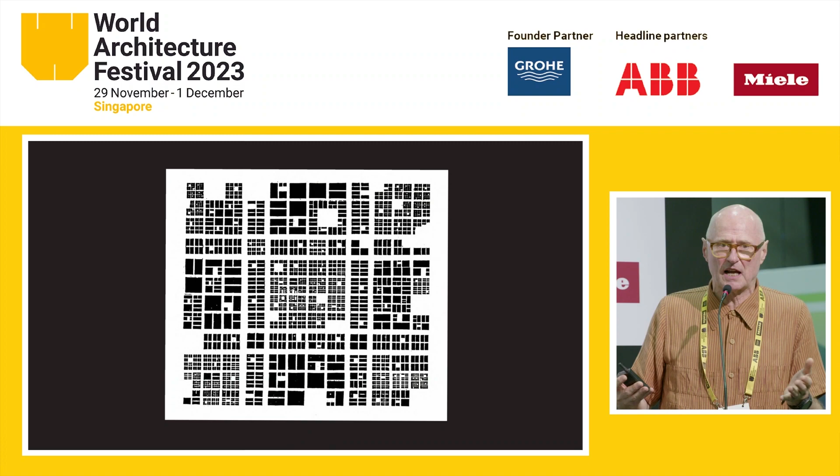As architects, as WAF shows, we tend to think about buildings, but buildings are really integrated parts of the city. As a profession, I think we need to take our thinking beyond buildings into ideas of the city and infrastructure. This is a student drawing we made 40 years ago, but it's all about the most permanent parts of the city anywhere in the world, even in a dynamic city like Singapore, which are the streets. Buildings actually come and go over time.

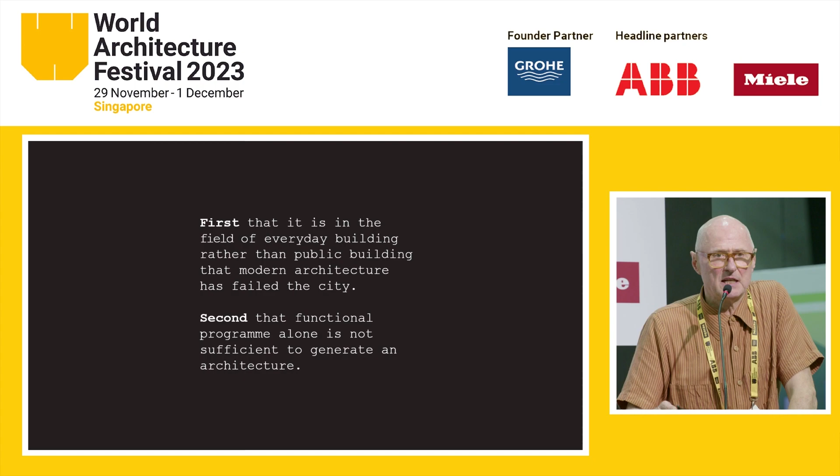We always felt when we were young, and we feel it now when we're old, that function - the thing we get to talk with our clients about when we commission a building - is a short-term proposition, whereas a building needs to be a long-term proposition. Function does not drive architecture.

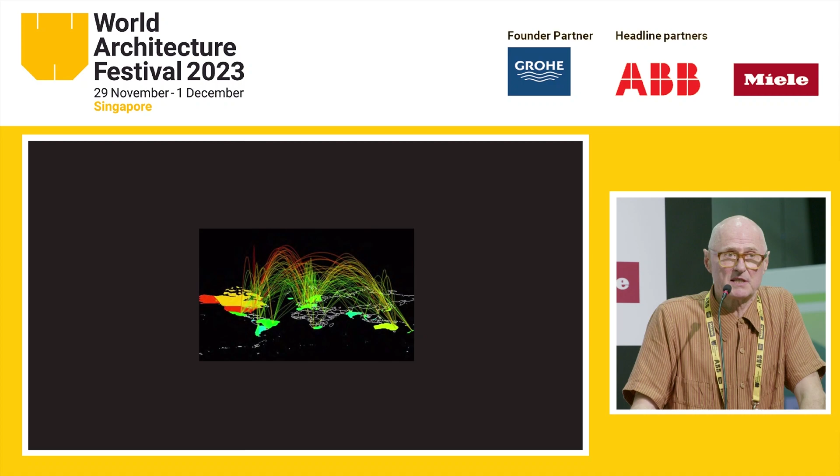We talk a little bit now about the internet, but the whole COVID thing demonstrated to me the importance of people coming together. The conversation, the eye contact, is a completely different experience. It is why cities will flourish, and people do need to exploit technology, but not to rely on it. That's the COVID world we experienced - a world of people trapped in their rooms, disconnected from society, an unhealthy world.

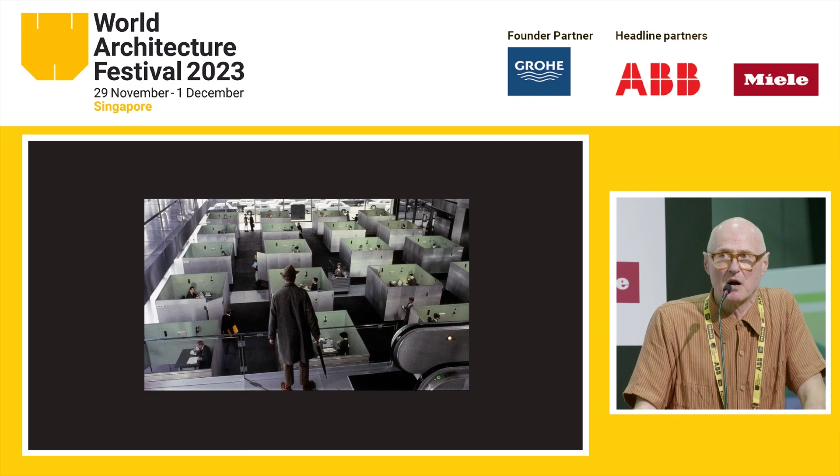City makers have always been aware of this. Cities are visions of the idea of town and country coming together in a place. The social promenade of the street is the civilizing force of the city.

Infrastructure. The street is the infrastructure which our buildings frame, but there's another form of infrastructure - the data movement, the water, the sewage, the transport. Those are the big drivers of future cities.

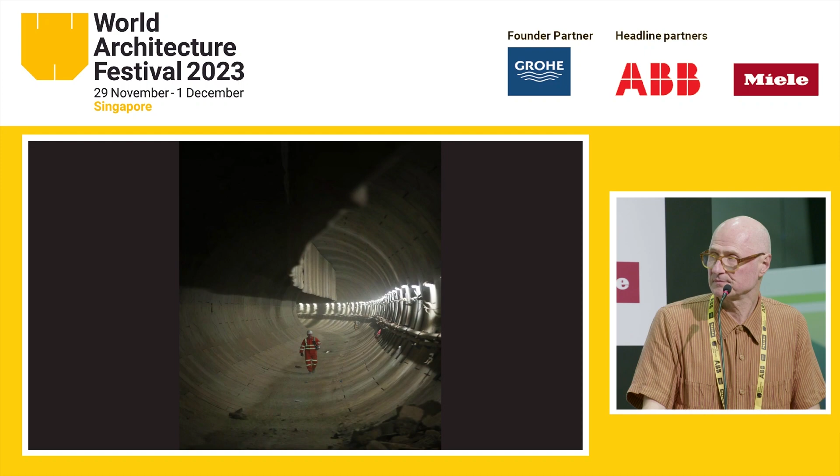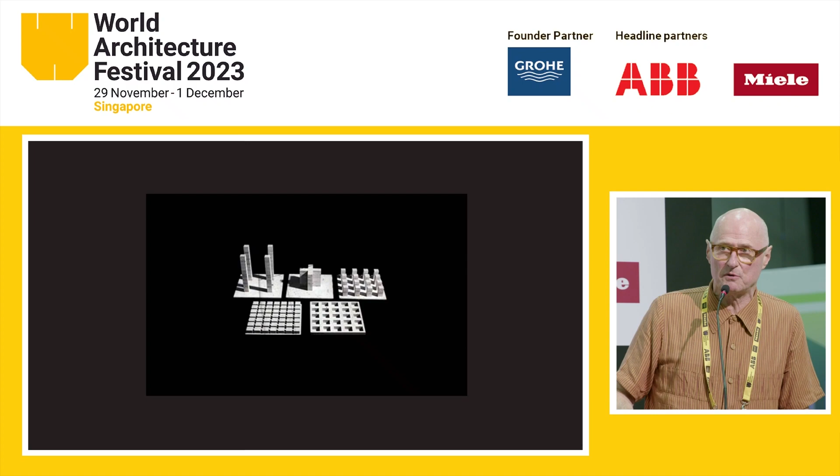The carbon discussion, which is going on around the world now, is in danger of doing the same. So we need to know numbers, but we also have to have a bigger idea.

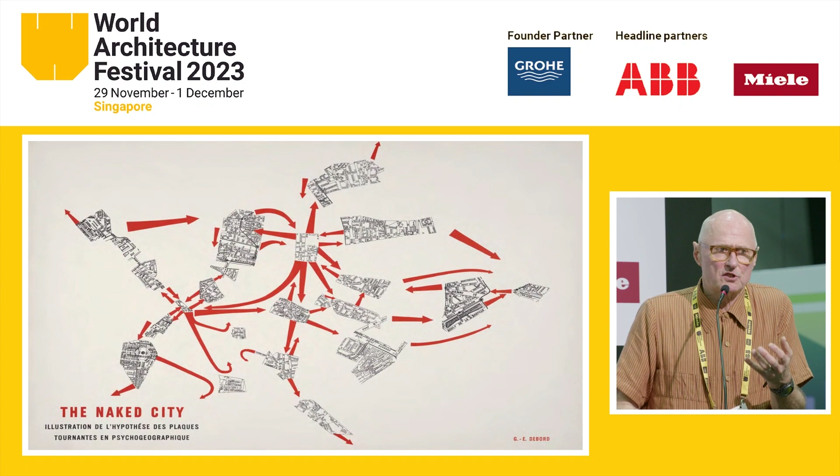This is Guy Debord, The Naked City. It recognizes that the city is different for each individual. Our journey through it, our understanding of it, is personal to us. So it's an infrastructure with infinite potential.

Increasingly in the low carbon world, I think we're going to start thinking much more about what materials are to hand and how we can use them, rather than designing and then going to find materials. In a sense, that's the ancient history of architecture. That's what vernacular is - it's looking at what's to hand, what are the skills, the people, and the materials.

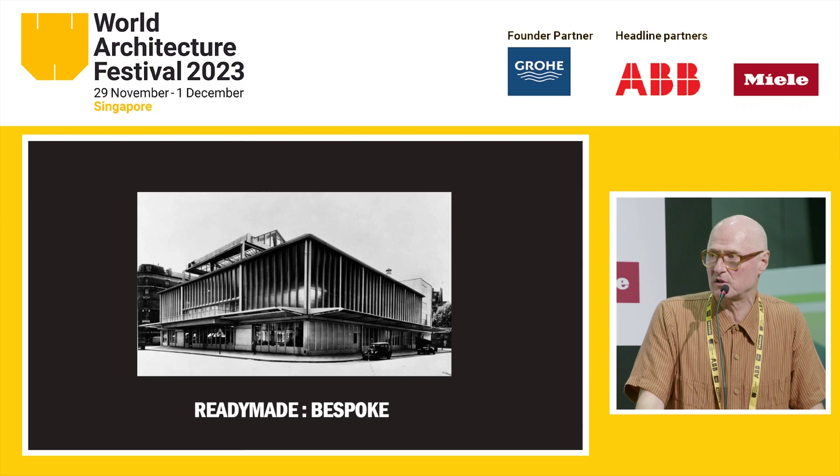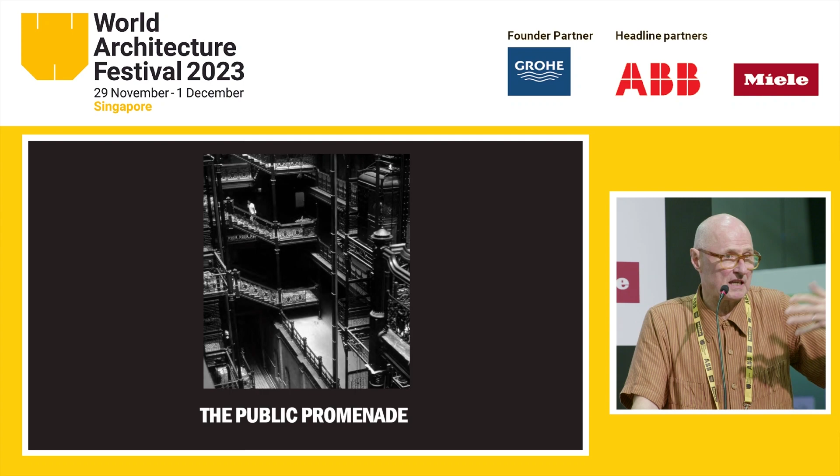So in a sense, at their best, our buildings frame an address to the street. And within them, the journey through them, the architectural promenade, in a sense, mirrors the city. The stairs, the lifts, the movements through our building are a three-dimensional mirror of the streets and squares within the city. And in the end, despite the fact that I'm very passionate about architecture, architecture is a backdrop to everyday life.

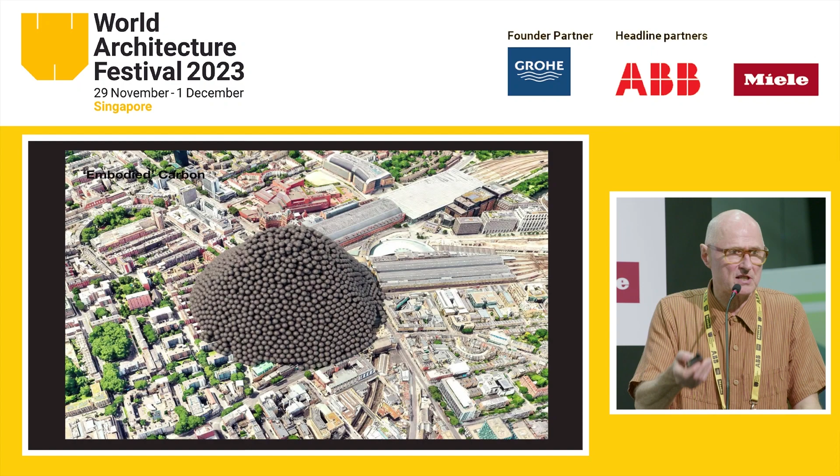This is a project, and now moving to this idea of what we're looking at in London now. This is a kind of graphic, in a way, a kind of homage to Buckminster Fuller, but talking about the carbon saving we need to make on a particular project. This is the diagram we use. This is the whole life carbon of a building.

This is the model that we're using in the UK. 1/3 is the embodied carbon to build it. 1/3 is the operational energy to run it over its 60 years. And 1/3 is the endless refitting of the building over those 60 years. That's what we're working to.

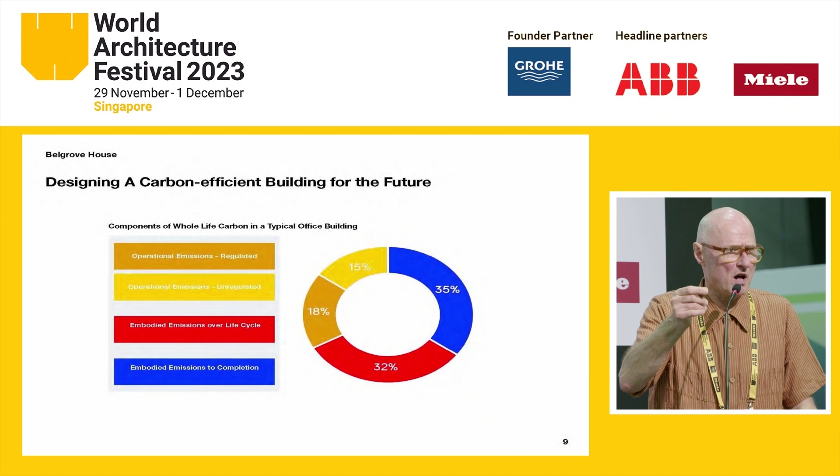I don't think it's a very good model. First of all, I think buildings should last forever now, so 60 years is too short. And then I also don't think we should waste all this money in one of the worst excesses of the modern world, which is this world of crazy, endless fit-out, the world of fish tanks and leather walls.

There are ambitious targets in London. So in the last 5 years, we've halved the embodied carbon in our buildings, and we're seeking to quarter the operational energy in use. Big, big challenges.

So all of these kind of numbers go back to the idea I'm talking about here, which is the frame. The frame is the first thing to go up, the last thing to go down. It needs to be generous, it needs to accept different uses, and it goes back to that idea that actually use is transient, building frame is permanent. The stage sets are the reality of occupation. That is the world of inserting a use of scale, an auditorium within a frame for a university. But most of our life is the props, the theatre of furniture, movable, flexible, adaptable space.

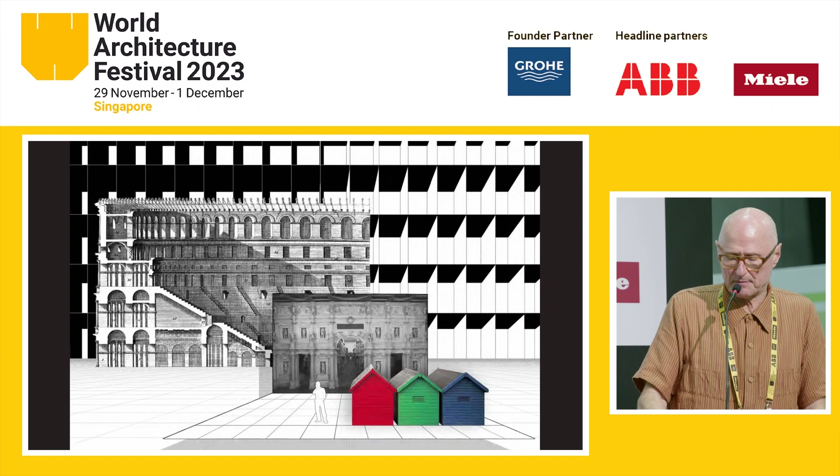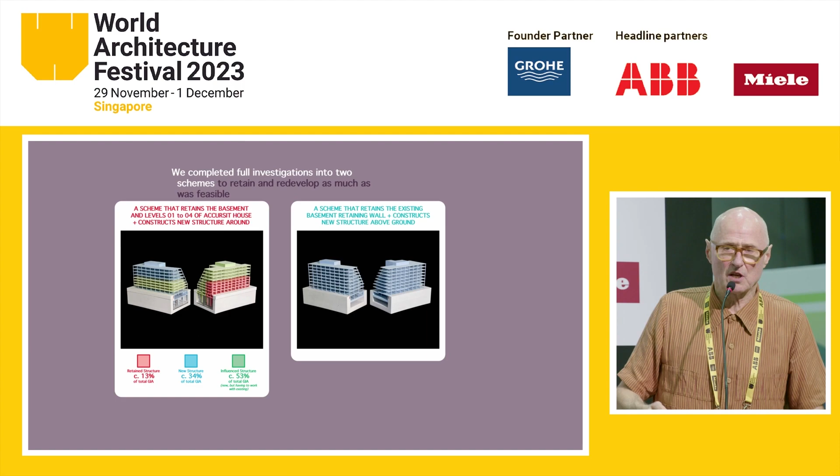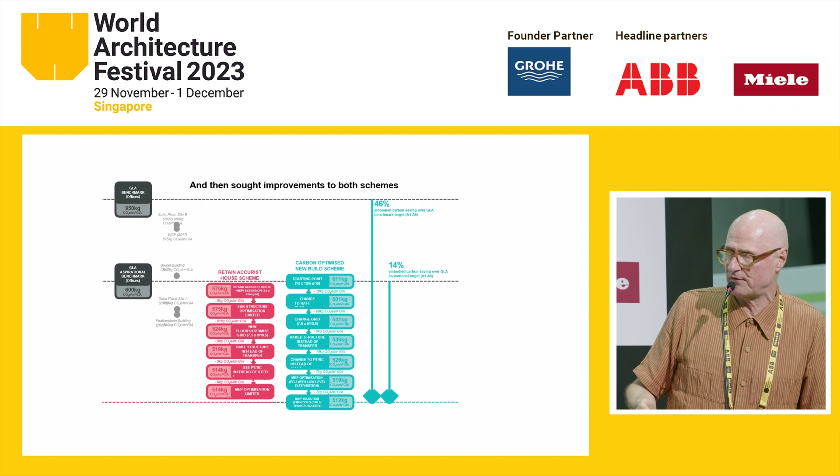This is the diagram we went through, the research diagram, and the blue on the right gets to a lower carbon number of about 512 kilograms. But of course, carbon's just one thing. There are a series of policy benefits, there are a series of social benefits, work, employment, housing, education.

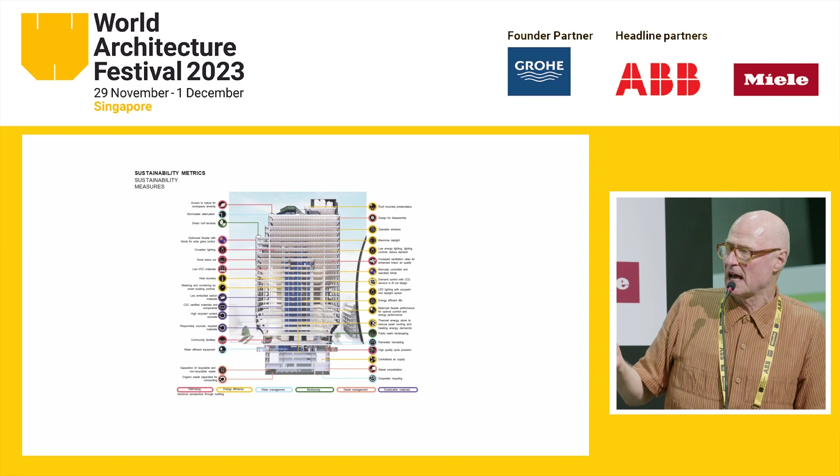This is an office tower in the city, built on a very undeveloped site right on the edge. These are the initial ambitions. This is the detailed analysis with our colleagues at Atelier 10 and our structural engineers, AKT2. This is the target, 1,100 down to 600. We're actually getting down to about 510.

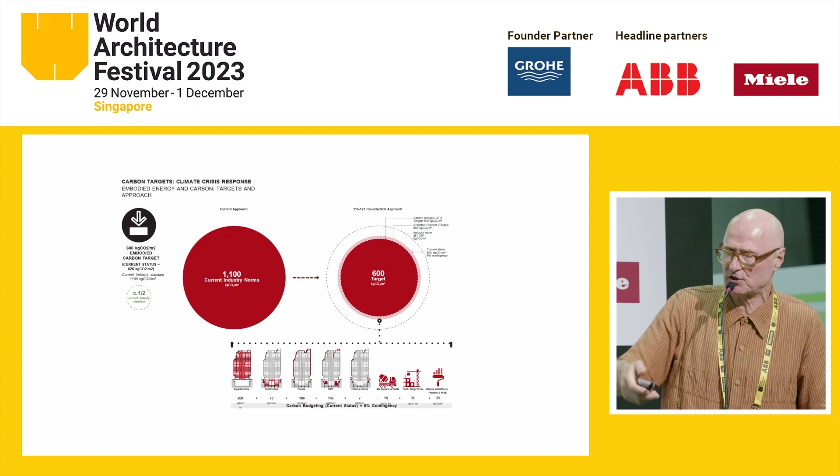The bottom is a kind of pie chart that shows where you bother to make the effort to save the carbon. So the big numbers are in the basement. Do we need basements? Here we store energy in the basement and then we give it free for social housing. So everything you do is always to be questioned.

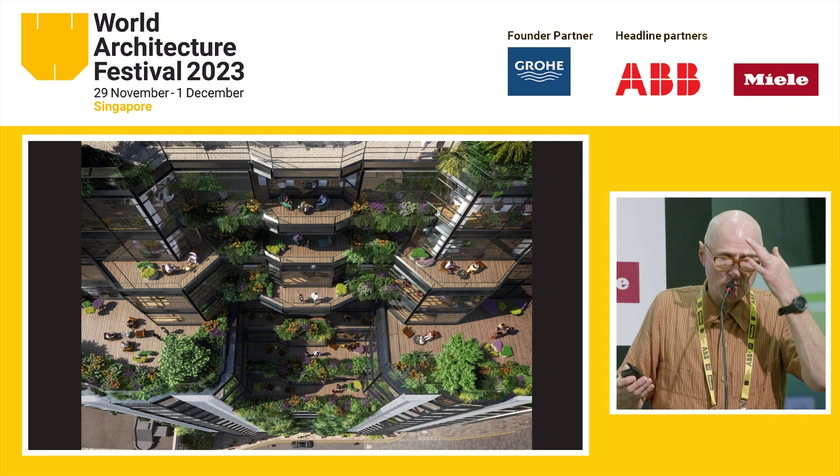This is the energy target, and there's a big problem we have in London, which is tying the base build to the tenant and getting the two to talk together. This is the architecture of the building. It's a biophilic building, it's wrapped in greenery, and has 20,000 square foot of terraces over 28 levels.

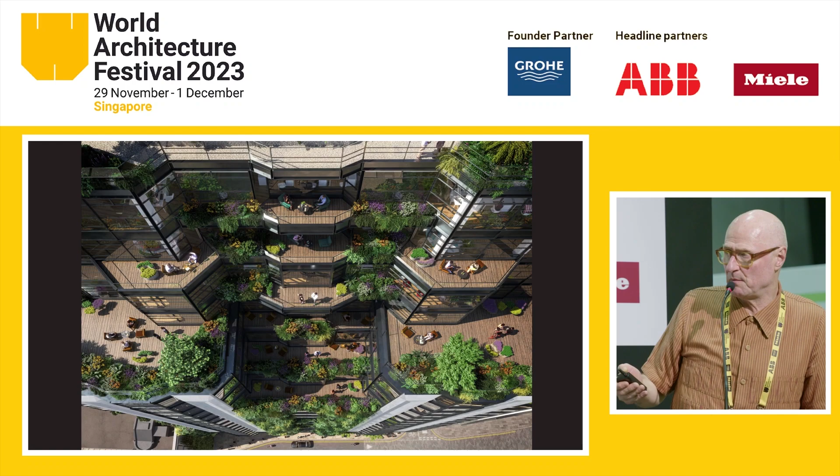One must not forget that a low carbon, efficient, generous frame that no one wants to be in won't work. On the left is a building in London that was only built 30 years ago, with 6 cores and an atrium. Sadly, a completely useless piece of real estate. On the right is our proposition, but it learns from that real estate.

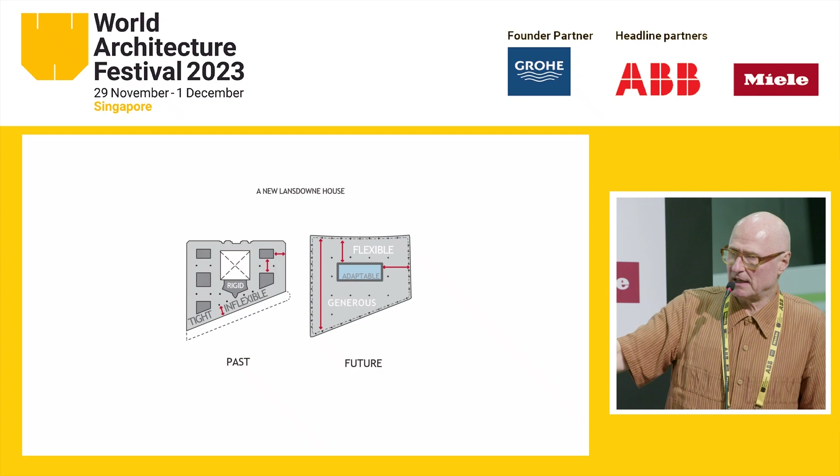The one thing we know is by the time you take the cores down, the building falls down. So we developed the idea of a donut where the core in the middle is not structural. It is a refittable item, and the building itself is a sway frame, a stiff frame.

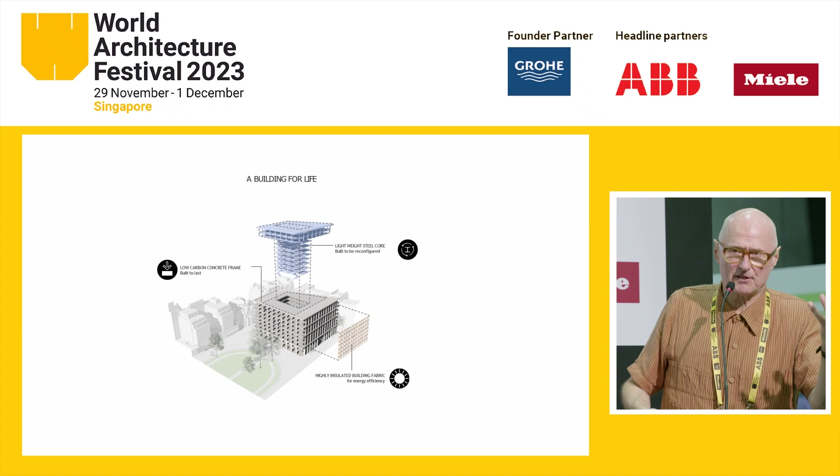So there's the diagram. You get the stiff frame and you get the lightweight core as an insert that can be endlessly refitted, but also the sway frame gives us an architectural reason, structure as scale, and we go back to putting windows in walls. And there's the building as it's now going up on Berkeley Square.

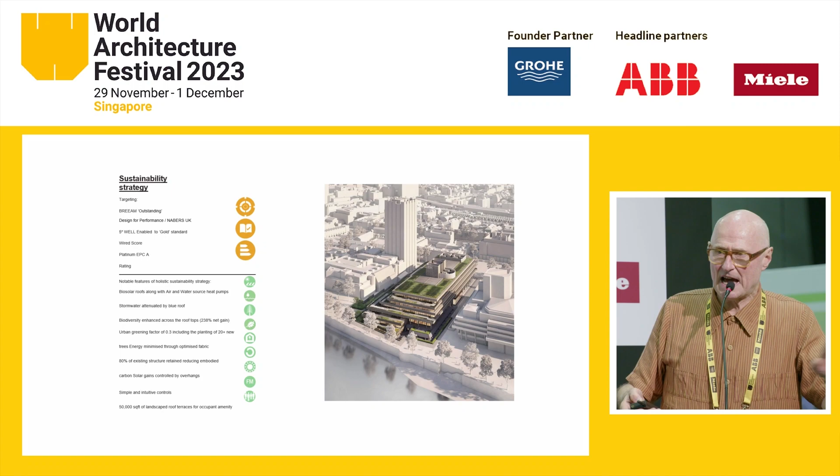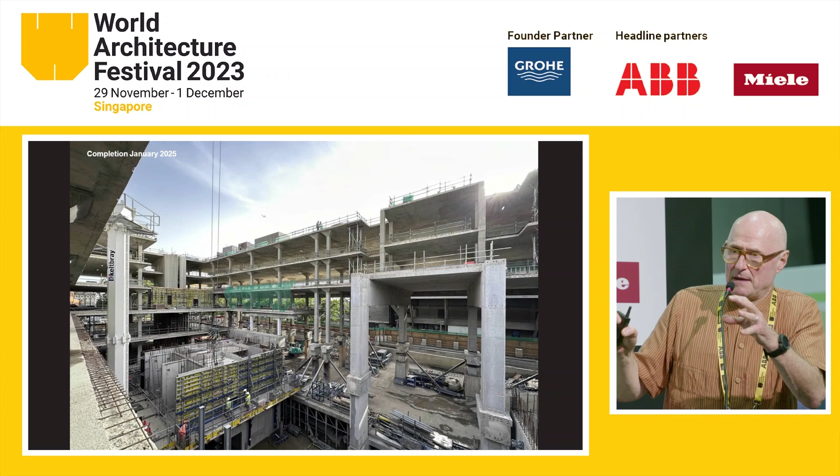This is IBM, a building that was listed while we were looking to adapt it. All the standards we talk about, NABERS 5-star, BREEAM outstanding, they used to be important, now they're a kind of basic level. We can get to below 400, we can get to about 340, we think. Even though we're retaining the building, we're still knocking 7 bells out of it, but the frame is being kept and extended, and that's the big driver, and then the new extensions are CLT.

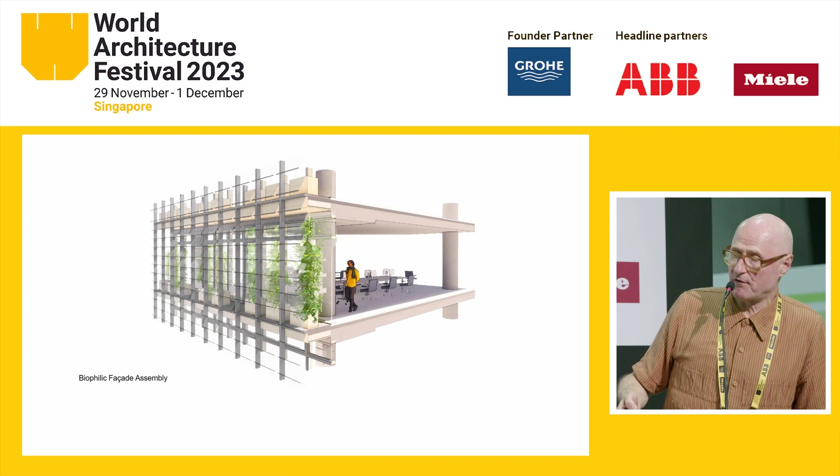This is a building in King's Cross. We take the building down, we recycle the bricks, which is a more poetic than necessarily an efficient idea. We build an affordable housing scheme. We build a new build labs for MSD, Merck, the global life sciences business.

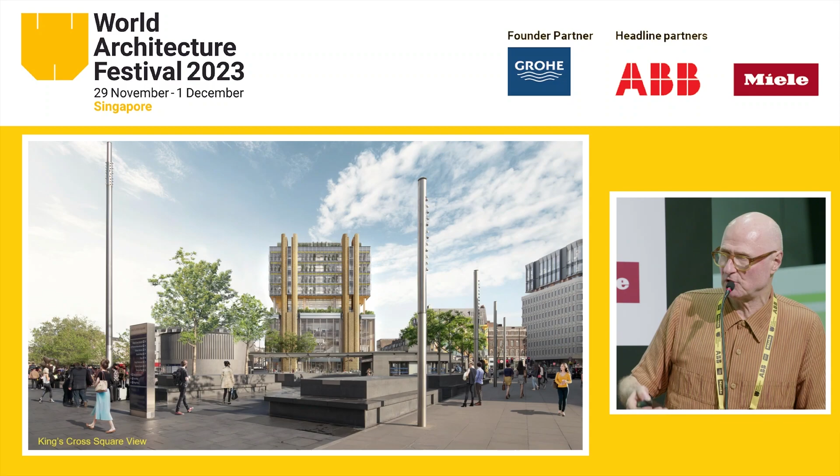We create the idea of a sheltered biophilic wrap, so the building sits as a kind of new industrial, 21st century industrial architecture right in the heart of London's knowledge quarter. And that slide has jumped to the end—I don't know quite how that happened.

But anyway, I'll finish there because it seems a nice moment to end. The point I was going to make, if I had a few more slides, but I won't bother, is that we are all on a journey. We cannot make assumptions and think they'll see us through. In the last 5 years, our entire thinking about embodied and operational energy has changed because the grid has gone green. Things will come and hit us in different ways. We've got to be alert, we've got to question orthodoxies, and of course, we've got to learn from history. Thank you very much.